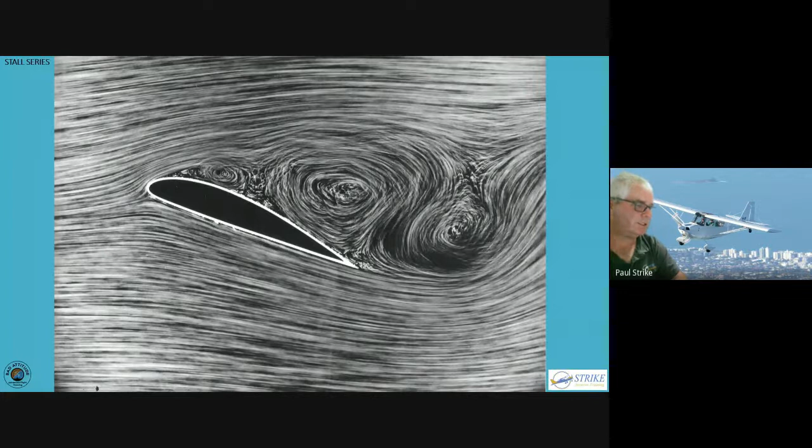So everybody should see a really nice picture of an aerofoil in a wind tunnel. I'm really excited, we've just acquired a wind tunnel. It needs a bit of work, but I'm really excited about it. It's on the list of things, the copious amounts of things that we have to do. If anybody can't see the stall, the wing aerofoil section on the screen, just let me know by audio. And as people arrive, I'll just let them into the room.

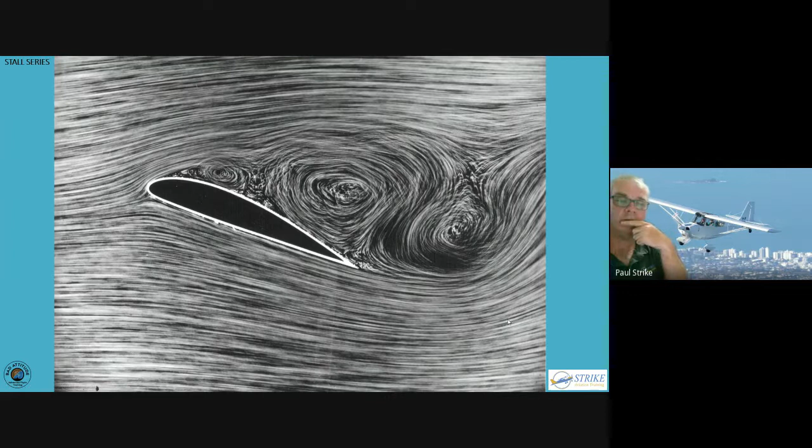All right, we'll make a start. So just a little bit about myself. I am a LAME, a licensed aircraft maintenance engineer, for you, Tony. And I did 16 years in the Air Force. I've worked in Canada, worked in PNG, worked in the Middle East. Got a company called Flight Safety Solutions where we've got a fully compliant aircraft record system that's CASAR 43 ready - that's a whole other presentation. We provide aircraft owner support, stands on board, and a couple of other people. From a flight training perspective, grade 1 flight instructor for GA and an RAAus flight instructor. I used to be the CFI, but my wife's taken over for that now.

I just got a phone call from somebody who's supposed to log in. Hello, Didi, you can't log on? Just click on that link and it'll just ask you to join in. No, the other one, on your original email from Try Booking, it'll have a link. Okay, I'll just email it to you. Sorry everybody, I'll just get Dita sorted out here. Dita, I'll email it to you, you'll have it in 2 seconds, mate. Yeah, bye.

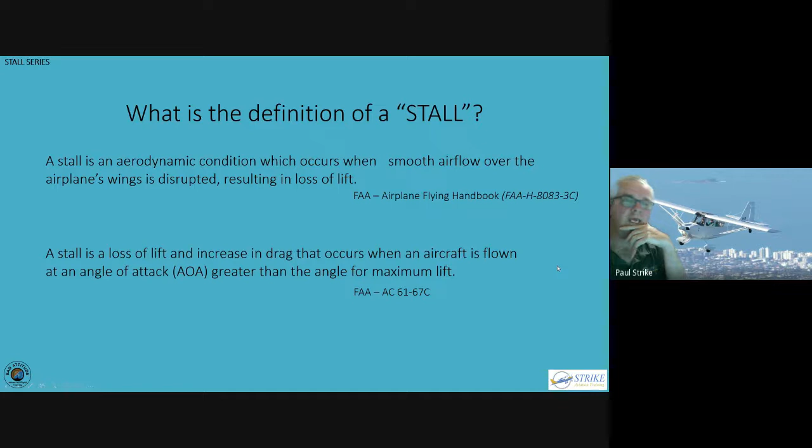So I had somebody say to me, what do you mean you're having a discussion on stalls? We've got published stall speeds, the bottom of the green arc without flap and bottom of the white arc with flap. What else is there? There are actually 3 contributors to a stall, and we're going to talk about all 3 of them tonight: angle of attack, speed, and load. So we'll start off with angle of attack.

Now, we'll start off with another definition. Angle of attack. This should be pretty generic. It's pretty easy. It's only one thing. It's the angle between the chord line of the wing and the relative wind. That's what the FAA Flying Handbook says. All right. So again, we don't want to get bogged down with definitions. We want to have it practical.

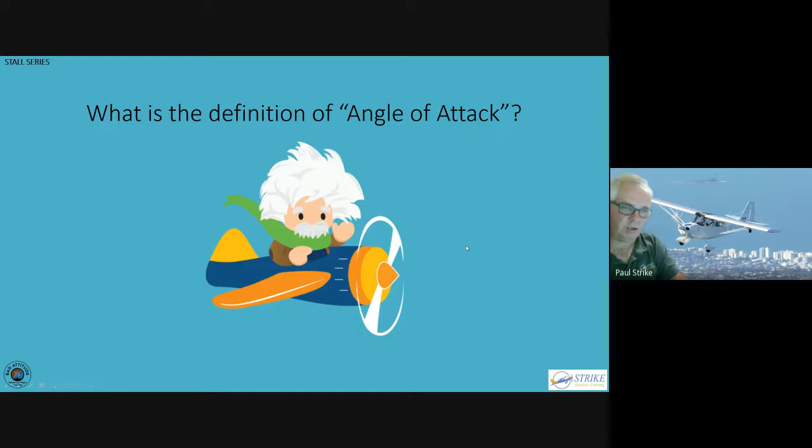So I had a commercial pilot come to fly with us from another school, and he'd actually undertaken upset recovery training as well. And we were having a discussion because he wanted to do a tail wheel endorsement. So we're having a talk about angle of attack and stalls and things like that. And this is the process I went through with him.

So what I'm going to do is I'm going to just ask anybody who agrees with these 3, raise your hand or with the little button. If you don't agree with what the answer was or what those examples were, don't raise your hand. So if anybody agrees that those 3 examples of angle of attack are correct? Raise your hand. Okay, nobody. That's awesome. That's really good. So it's clearly not correct.

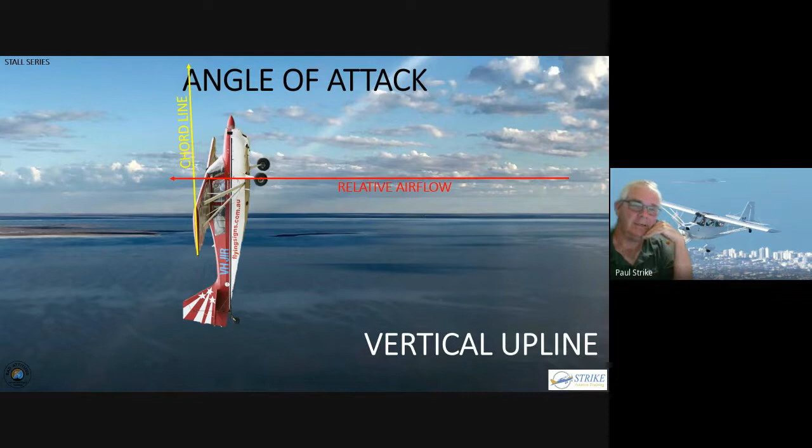So let's say I apply full power and pull back on the stick, and I'm going vertically up. That's our chord line. Where's our relative airflow coming from? And again, he said, here. And I went, okay. What about if I'm pitching vertically down? This is my chord line. Where's my relative airflow coming from now? And again, he said, here.

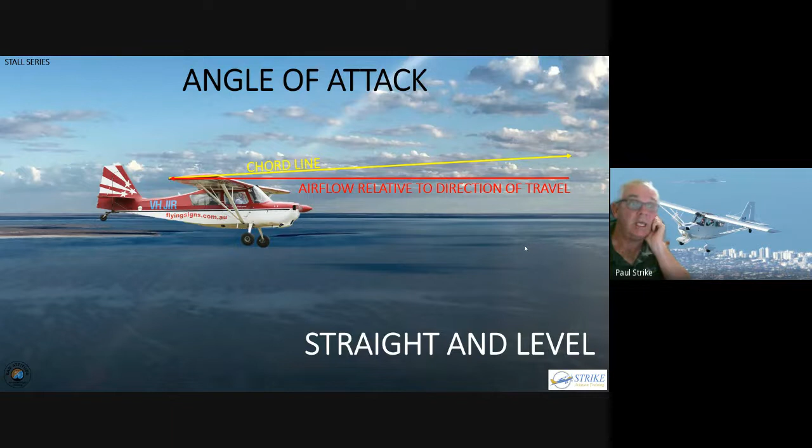So I basically had this. Okay, we've got a clear absence of some understanding here. So I changed the words again. I said, look, if we're flying straight and level, and this is our chord line, this is the airflow relative to our direction of travel. And he agreed, yeah, that's right. And I said, that's our angle of attack.

And so every time we read a definition, this one word here, this word wind, the way we deliver it, we need to make sure that people understand that, because people can take that 2 different ways. So that's just an example of how reading a definition in a book but applying it to real life can be confusing. So we've all seen this picture, I'm sure.

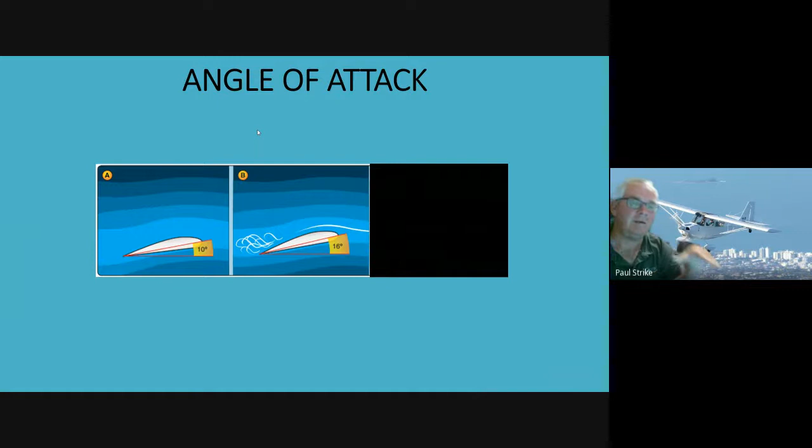If anybody hasn't seen it, this is an example of the airflow over an aerofoil section from our good friends at Boldmethod. And then at 16 degrees, we get a bit of turbulence, and at 17 degrees, we get a lot of turbulence. So this is what we call the critical angle. Actually, sorry, I'm going to go back to here. The point at the stall is the critical angle.

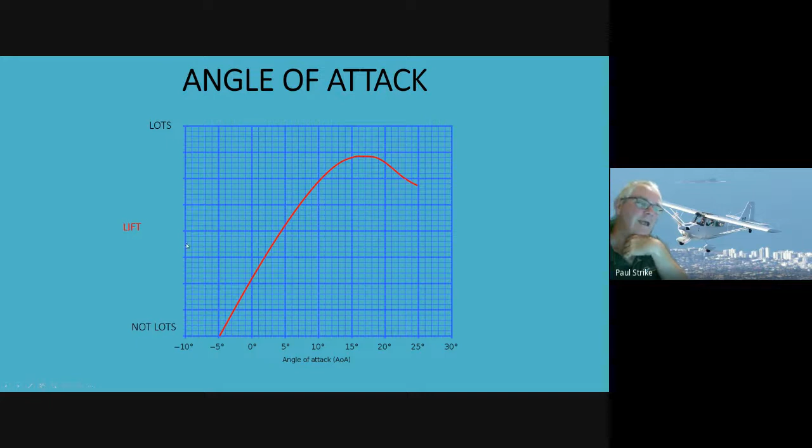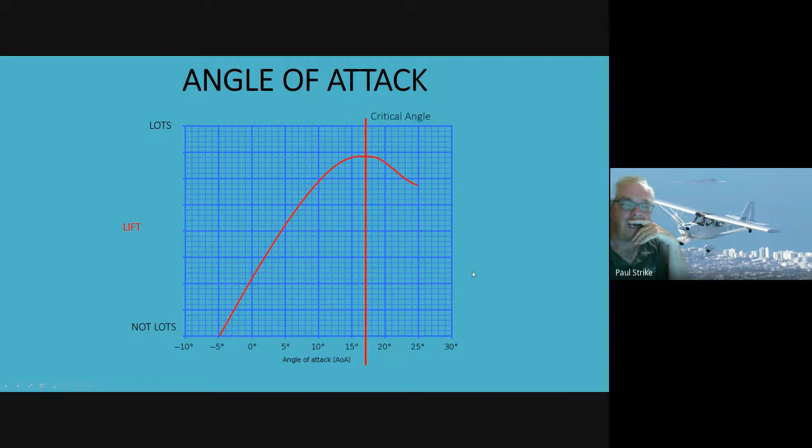And the values really aren't important. Up the top, we've got lots of lift, and down the bottom, we've got not a lot of lift, if everybody can follow that. Now, ask around the bar room at any pub, and you ask, what's the critical angle? Some people will say 15, some will say 16, some will say 17, some will say 19, some 18, whatever. We're just going to use 17 as an example.

We need to realize that this is not a definitive graph for any particular airplane. It's just for diagrammatical purposes only. But if I ask what is a stall, I sometimes get the answer: when the wings are no longer producing lift. Now, I don't know if any instructors have heard people say that, because people read books and they read these examples of definitions. It's when it's not producing lift. So let's have a look at this chart and dissect it a little bit.

So let's say we're flying at 15 degrees angle of attack, and we'll come across here and we're producing X lift. All right. Now I'm going to increase the angle of attack to 19 degrees. And if I read this graph right, and all the scholars in the room will say that I'm actually producing X amount of lift. It's the same amount of lift that I produced at 15 degrees angle of attack on the left side of the critical angle line, but at 19 degrees.

So if the lift generated by both sides of the critical angle is the same, then why are we stalled? I'll pose that question to you guys and girls now. Write your thoughts in the comments box.

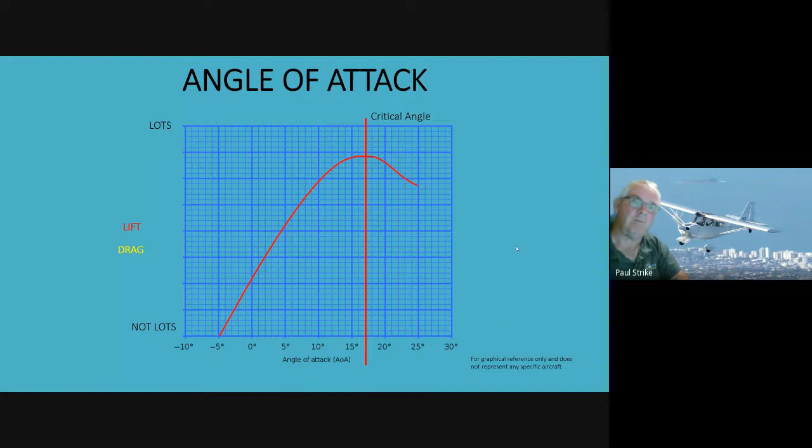I just want to highlight this statement down the corner here: for graphical reference only, does not represent any specific aircraft. However, I've had some very smart people who helped me out along the way send me a whole bunch of stuff from NASA and flight testing and all that sort of stuff, and it just spins my head around. So I try to take what I've got and make it more readable for us mere mortals. So the drag curve against angle of attack goes like this.

Does that answer the question? Oh, good on you, Dieter. How are you, mate?

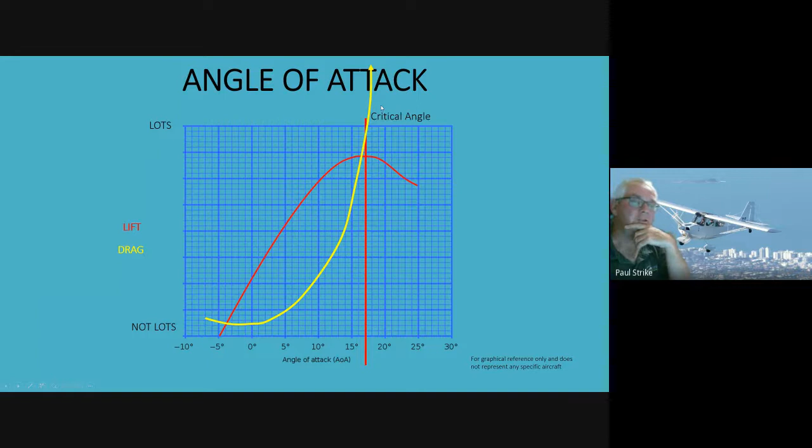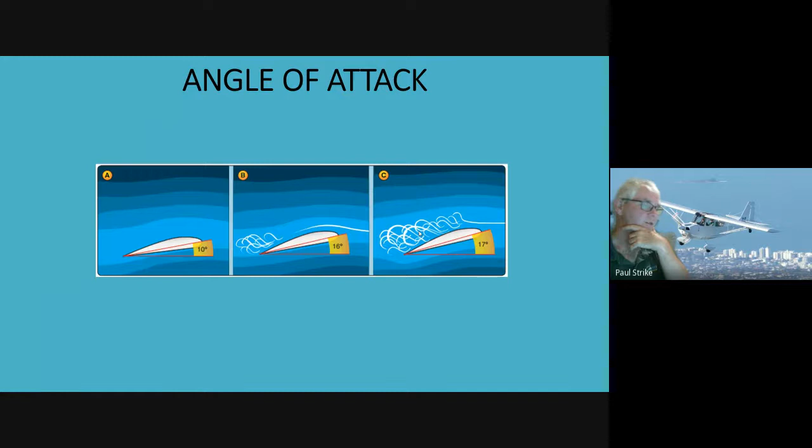So, past the critical angle, the amount of drag, have a look at that chart now. Above 17 degrees, all of that drag is the reason why we're stalled. So, moving on, there's a lot more about angle of attack. We're just trying to keep it in a controlled environment here. There's a lot more to learn.

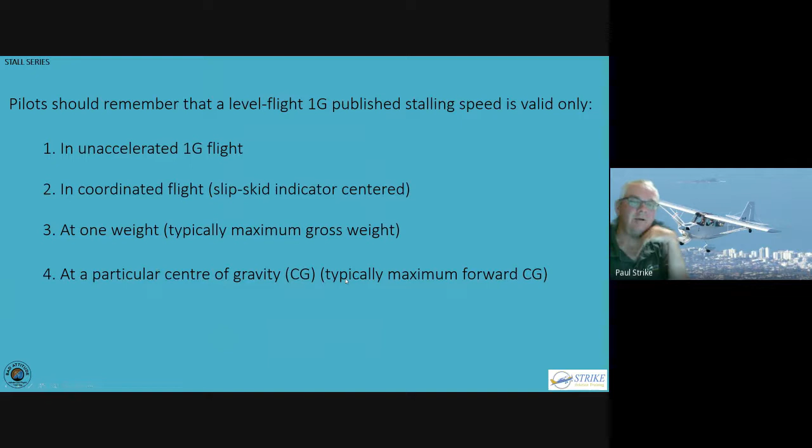Everybody should remember that at level flight in 1G, the published stalling speed is only valid for unaccelerated 1G flight, which means you're not pulling any G, you're not loading the airplane. You're in coordinated flight. You're at one weight, typically the maximum gross weight, and you're at a particular center of gravity, normally the maximum forward CG. So there's a lot of things to consider there, a lot of variables, all right? And we're going to talk more about these variables.

Not very exciting. And we'll be talking more about those on the next episode, which will be in the next couple of weeks, because I've got to do a whole bunch of video editing.

So how do we perform this? From straight and level balanced flight, we are going to reduce the power to idle and apply a little bit of rudder to maintain balance, left rudder. And that's a whole other story. If you're not sure why you need left rudder, give me a call and I can give you about 5 seconds on that. As the aircraft starts to descend, if you want to maintain altitude, you need to increase the angle of attack. That's your basic slow flight rule.

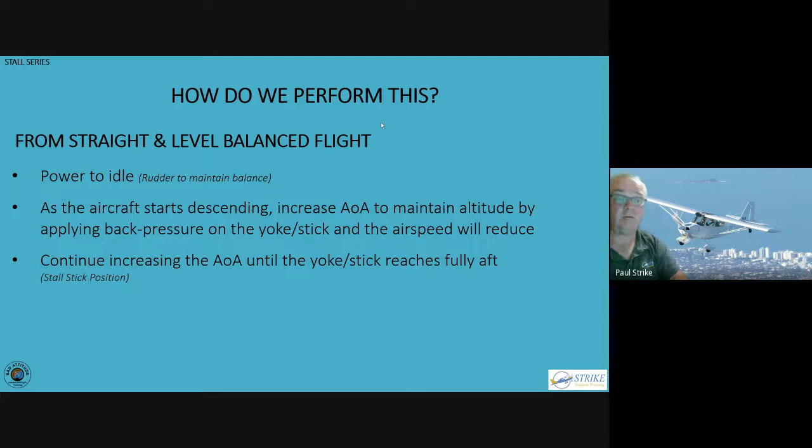I'm going to reduce power, increase the angle of attack by applying back pressure on the yoke or the stick, but we're going to sacrifice airspeed. As we continue to reduce the airspeed, we're going to descend. If we want to maintain altitude, we need to continue to increase the angle of attack until the yoke reaches the fully aft position, and that's called the stall stick position. If nobody's heard of that, make yourself familiar with it. We're going to be talking about it a couple of times during this presentation.

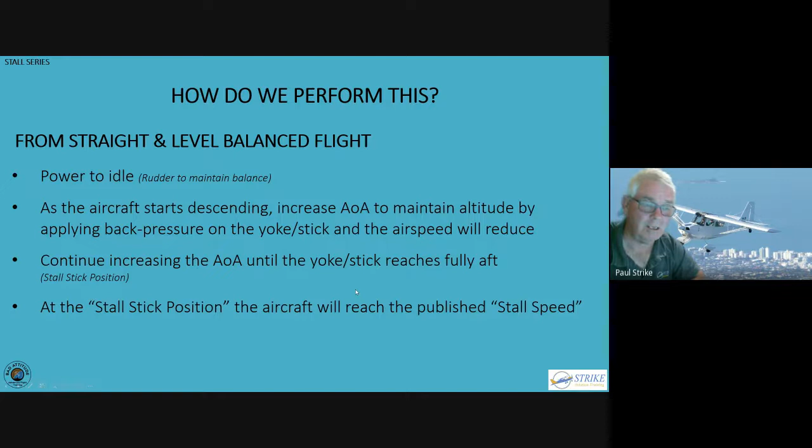At the stall stick position, the aircraft will reach the published stall speed if we're at wings level at 1G. Simple as that. Now, most pilots, as I said, will recall this exercise and that they do it slowly and deliberately at idle and 1G. So we're just going to break down this slow and deliberate at 1G. We're flying straight and level. Our thrust will equal our drag and our lift will equal our weight. That's what straight and level is. Straight and level unaccelerated flight.

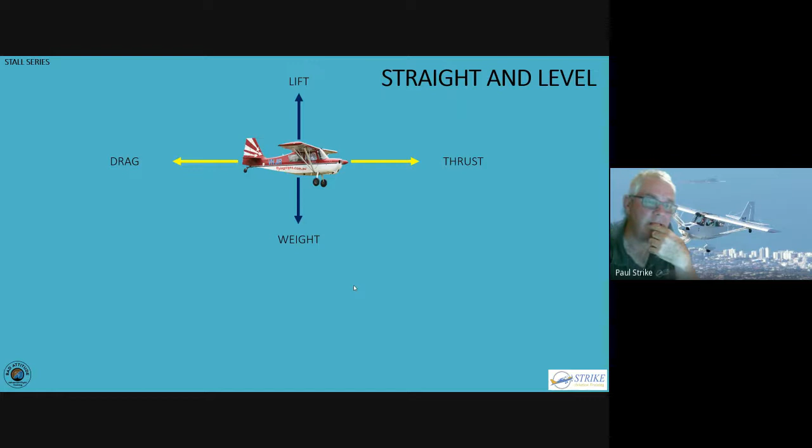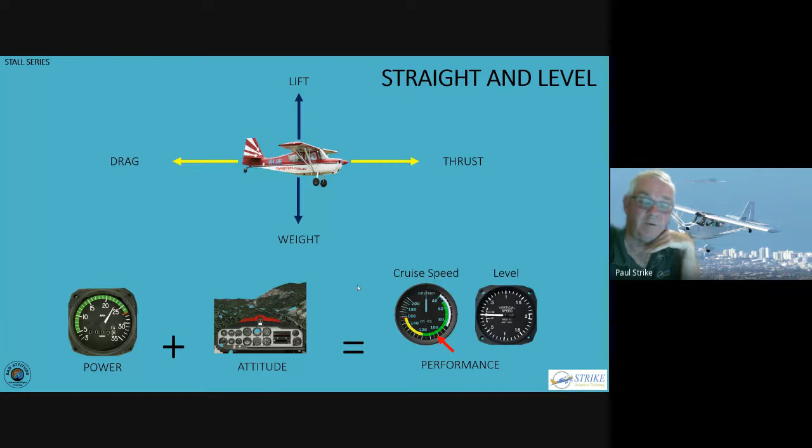So we have power at 23 plus our cruise attitude, which will equal our performance, which will give us our cruise speed, and level flight subject to thermal activity. Okay? And if anybody's got a question at all, just raise your hand or click your microphone on and say so. When we're going to go do the idle stall, we'll go through that process.

So we're flying along and we've done our HASELL checks or our pre-aerobatic checks or maneuvering checks. And we're going to reduce the thrust to idle and our drag will start to increase. And if we want lift to remain the same as weight so that we maintain our altitude, we need to ease back on the stick, increase the angle of attack, and create more lift. What that means is if we've got our power at idle, we need to have an increasing nose attitude, which will give us a decreasing airspeed to maintain level flight.

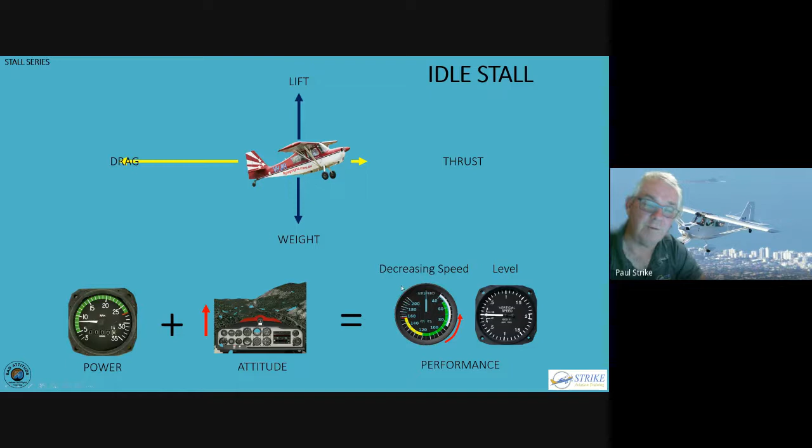All right? So looking at that with a relationship from our three wing sections here with the different angles of attack, we've got our aeroplane flying straight and level, and this is our airflow relative to the direction of travel, and it's horizontal to the horizon because we want to fly level. That's the name of the exercise. We reduce power to idle, and we will start to descend if we don't do anything. The nose will pitch down.

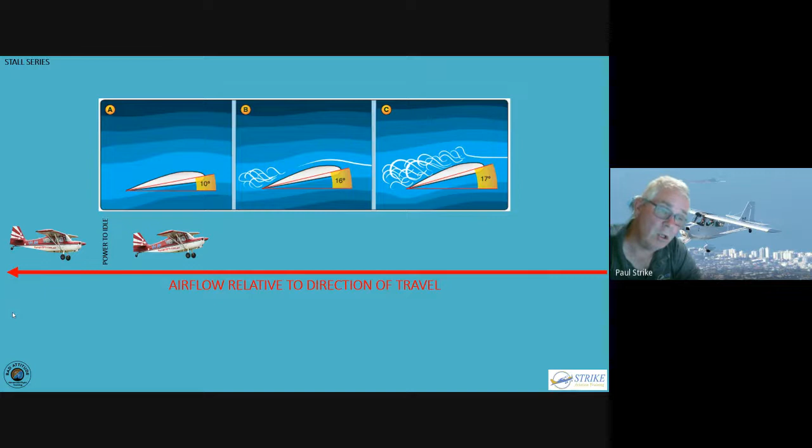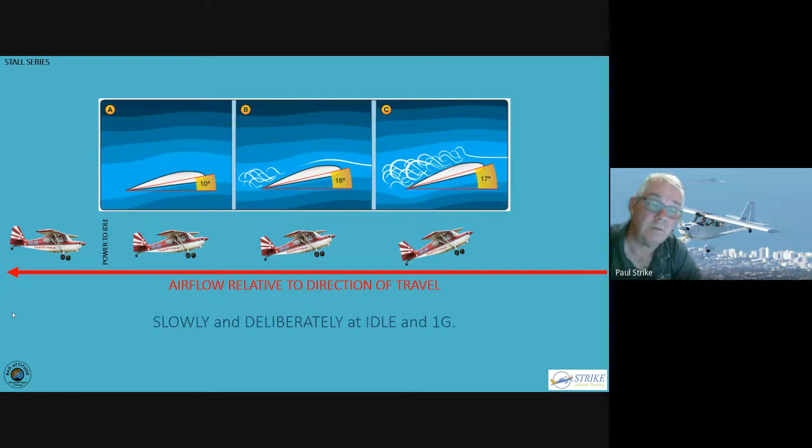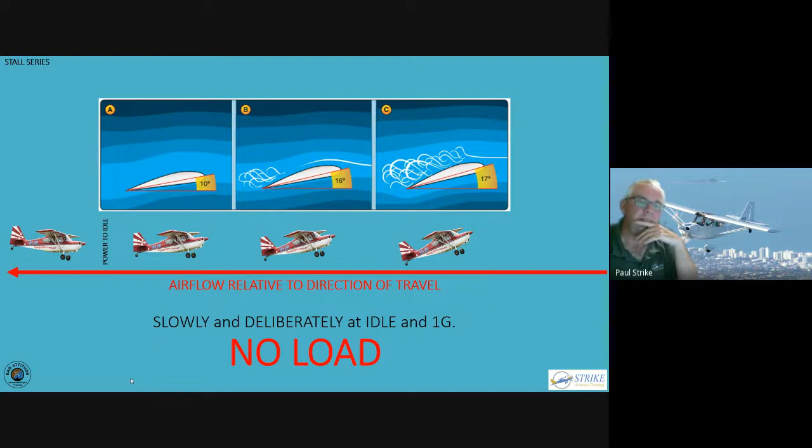But if we want to maintain our altitude, we need to increase the angle of attack. And as we slow down more, we need to increase the angle of attack more. The stick comes back to the stall stick position and we are stalled. Slowly and deliberately at idle and 1G. No load. Now, that's a statement that a lot of people who are not interested in aerobatics are not really sure what that means. So let's have a talk about what we mean by no load.

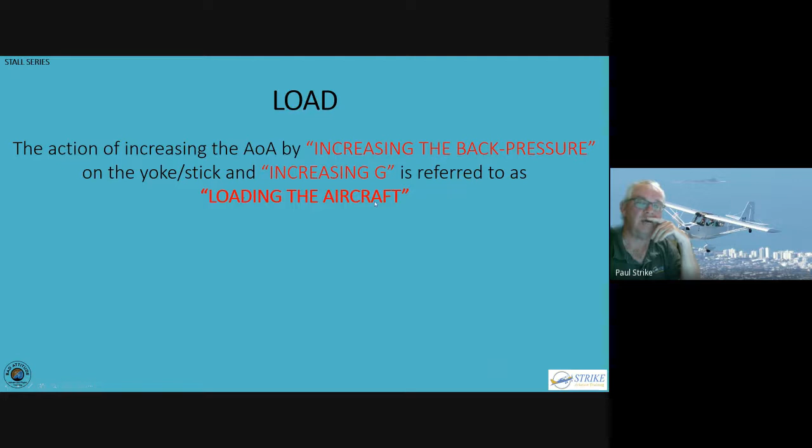So what is this load thing? The action of increasing the angle of attack by increasing the back pressure on the yoke and increasing the G force is referred to as loading the aircraft. The action of decreasing the angle of attack by releasing the back pressure on the yoke and decreasing G is referred to as unloading the aircraft.

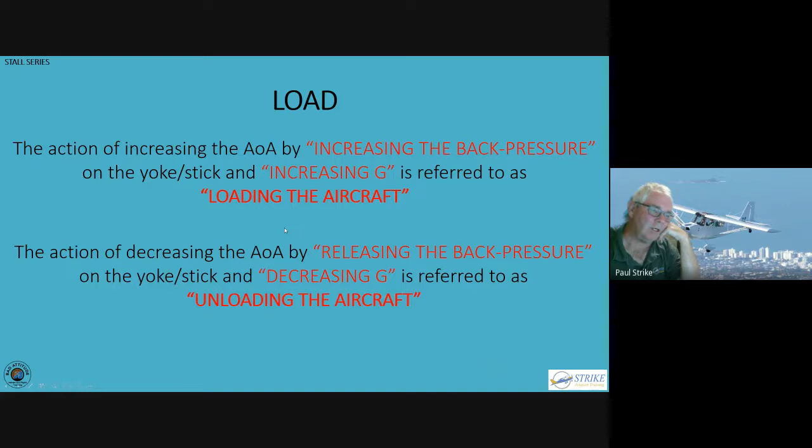Now, it's important to remember here there is a difference between pushing the stick forward and releasing the back pressure. All right, and we'll be talking a bit more about that in our video dissection in a couple of weeks. But for now, let's have a look at the effects of load factor relative to the stall.

Now, again, this diagram is something that I found very, very useful, but I didn't learn about it until after I'd become a flight instructor, and nobody really talked to me about it. I think a lot of people in their initial training, this might be too much for them to get their head around, but I think everybody in the room here has probably got enough experience to understand what we're talking about. So what we're going to be talking about is what's called a Vg diagram, and this is the indicated

airspeed, the velocity. I'm having a problem with my mouse. Just had a bit of a runaway here. We've got... giving away all my trade secrets here. Sorry about this, guys and girls.

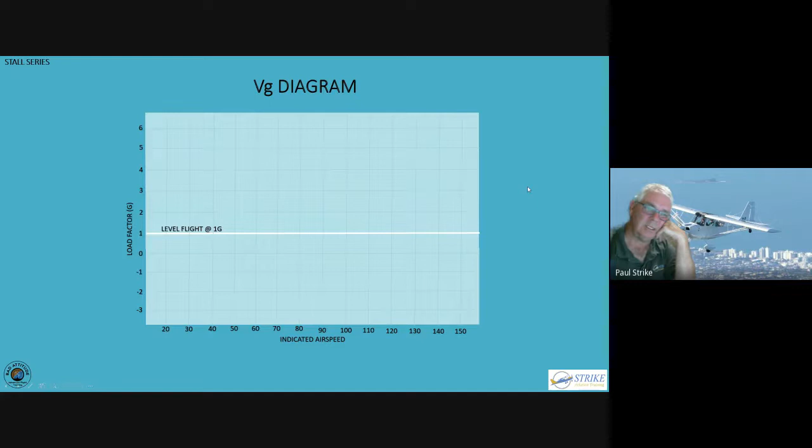So we've got indicated airspeed and load factor and level flight at 1G. Now, if you've heard the statement, keep it in the envelope, we're going to talk about the envelope. So fly within the envelope. And this envelope, the Vg diagram, is how the colors on the airspeed indicator are derived. So follow me through the bouncing ball and we'll have a look at this thing here. So this is a fictitious aeroplane, by the way.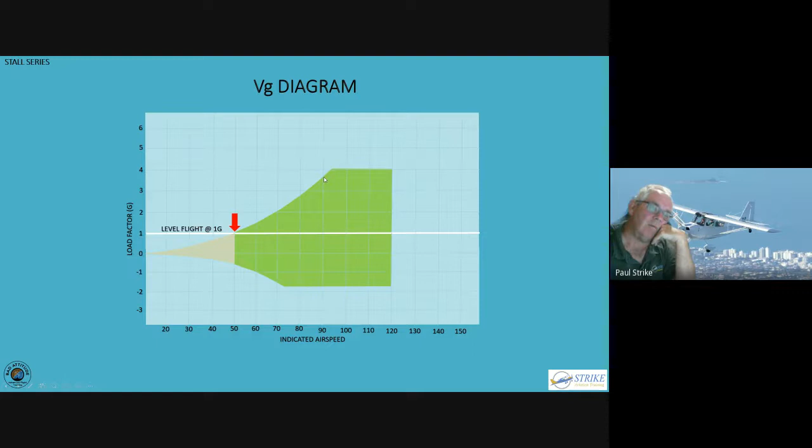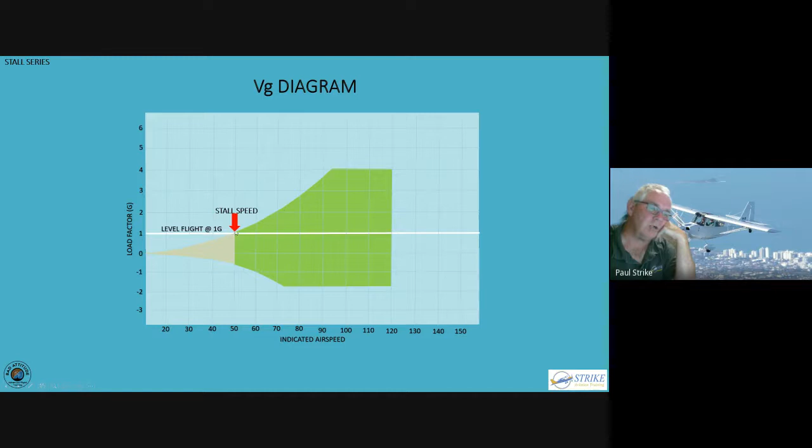This point here is the bottom of this line. This line here, I've got my little red spotter. I hope you can see it. This line here is the stall line, and this line at 1G is 50 knots. And that is our stall speed for this aeroplane, where the stall line intersects the 1G line. And on the airspeed indicator, it's the bottom of the green. I'm not going to worry about flaps for this example. We're just talking about the bottom of the green.

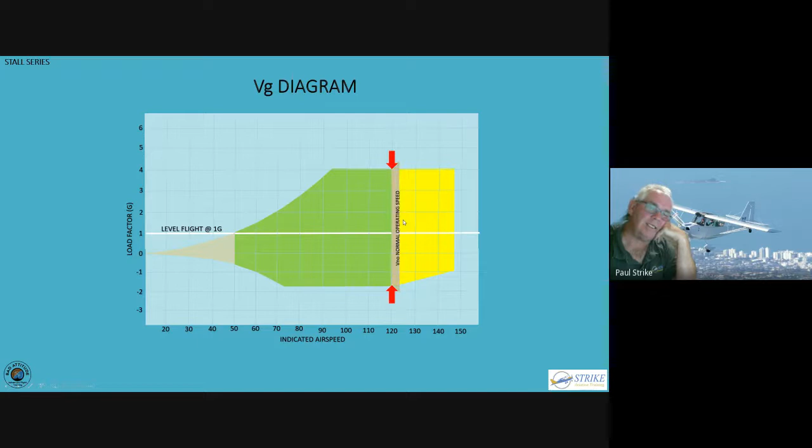Dieter sent me a message. I can't read that, Dieter. Sorry, mate.

So that's the maximum positive G. And this point down here is the maximum negative G for the aeroplane. Now, important thing to note about maximum positive G is that that is the point at which you should maneuver below. You should never exceed that, because the manufacturer of the aeroplane needs to ensure that there is a 1.5 tolerance from the maximum G before there is a structural failure.

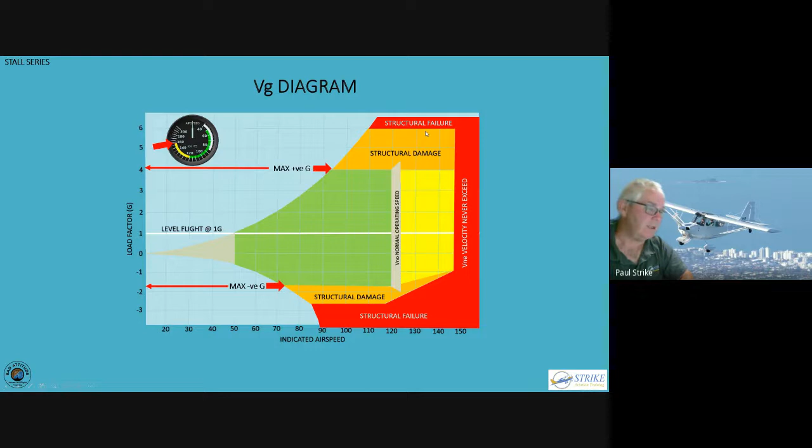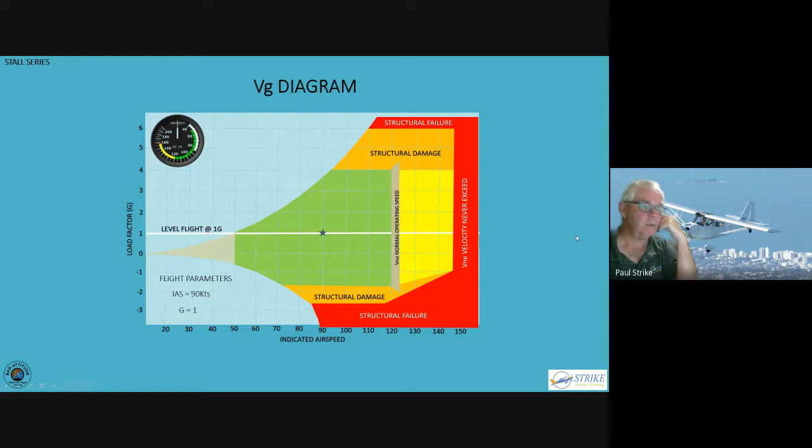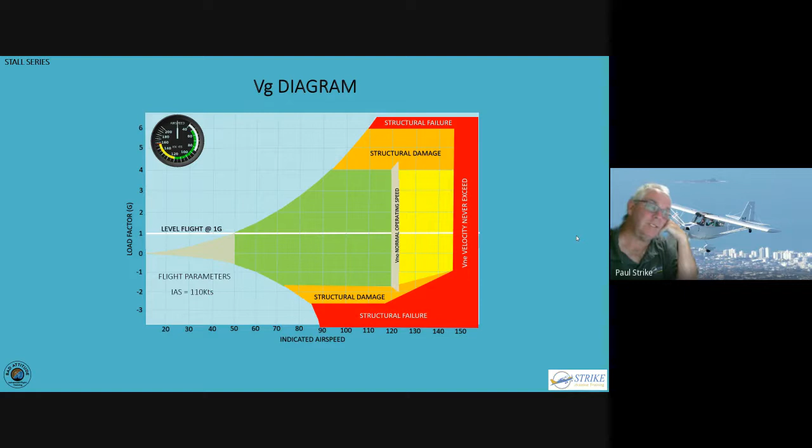So let's have a look how we can use this graph and read this graph. If I'm flying the airplane at 90 knots and I am flying at 1G, I'm going to be at this location on the VG diagram. That's right there. That's probably normal cruise for your generic Decathlon or Citabria. If I fly at 110 knots and I pull 3G, then I'm going to be at this spot here. Now, that's still within the normal parameters of this aeroplane, so that's safe. All right?

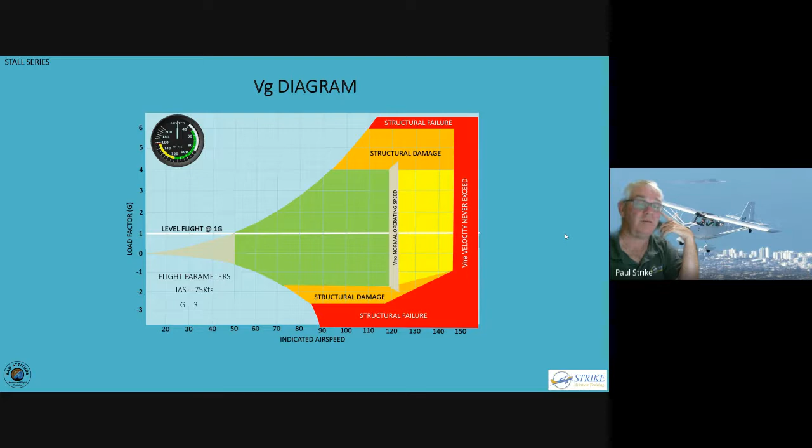If I'm flying at 75 knots and I'm flying at 1G, just cruising along straight and level, I'm going to be there. However, if I'm flying at 75 knots and I pull 3G, I'm going to be outside. And as a matter of fact, the aeroplane will actually stall on this line coming up from the 75 knots. It'll stall right here at about 2.3 G. And we'll talk more about that in a second.

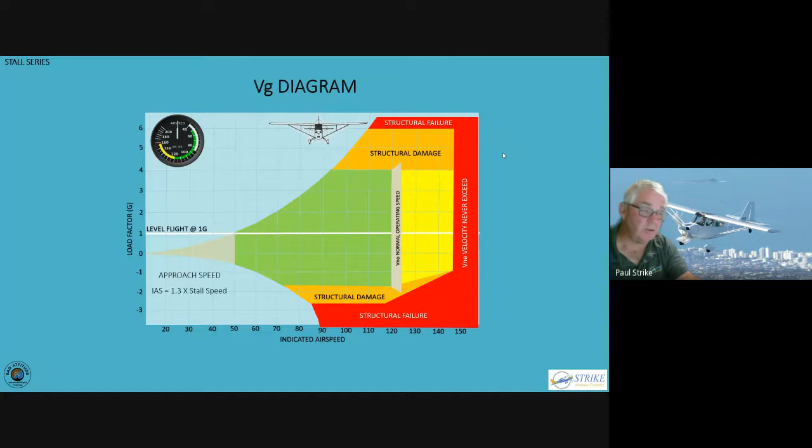So let's think about when we're on an approach. We're slow, we're configured for a landing. What's our approach speed? Well, our approach speed, for the instructors in the room and the others, as a general rule of thumb, is 1.3 times the stall speed. And with all the wind we've been having lately, you might want to put a little bit on for the wind. But for our example here, we've got a calm day.

Hello, Greg sent me a message.

Everybody just turn your mic on and say hello, make sure I'm not talking to myself. Hello, hi, hello. We can hear you. Can you see the presentation? Yes, yeah. Oh, you guys can see me too, I did not know that. Like I said, it's the first time.

So our approach speed for this aeroplane, if our stall speed's 50, then our approach speed is going to be 1.3 times that, and that's going to be at 65 knots. That's a valid speed to come in at, not too much energy, and a good buffer away from the stall, which is at 50 knots.

So you can see the red circle there is the stall point at 1G, and we're approaching at 65 knots at 1G. No load. We're not pulling on the stick and creating G.

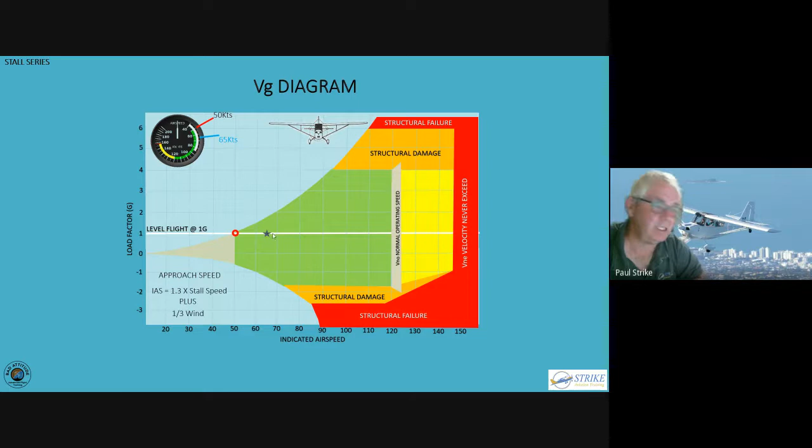Now, a lot of people talk about the stall spin, the base to final, the downwind, the base turn, all that sort of thing. How many people have had an instructor, or if you're an instructor, how many instructors have said to their student, don't bank steep close to the ground? Lots of people? Yes. Hands? Yes, yes, all right.

Did your instructor ever tell you why? Yes, no? Or did you just go, oh, my instructor said don't do that, so I'm not going to do it?

Yeah, I guess when I was being shown how to do this, I was told don't bank steeply, but principally because if you, for example, overshot the centre line of the runway, you wouldn't be tempted to yank back on the stick to try to get back on the centre line, which then loads up the aircraft. And if you're not balanced, you're in all sorts of trouble then.

Yeah, exactly right. Okay, so for those of you who have had an instructor tell you, who hasn't told you, did you ever ask? So don't be afraid to challenge your instructor and find out more if you've got that thirst for knowledge. So let's have a talk about the angle of bank and the load factor.

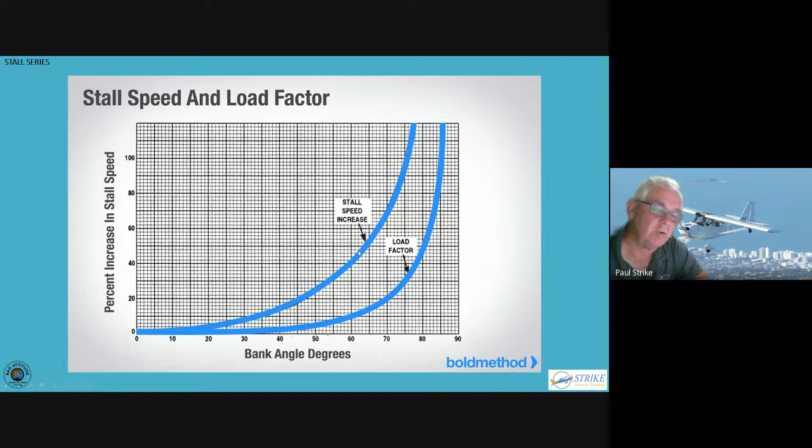So this graph here, again from Boldmethod, when we bank the aircraft, if we want to have level flight - now this graph only is applicable if you are trying to maintain level flight, and we'll talk more about that in a minute. So for a load factor, for each change in the load factor, there will be a stall speed increase. All right, and we're going to look at that now.

So let's say we're flying along and we are on the base to final turn, for example, and we apply aileron and rudder in balance and we get 30 degrees angle of bank. Now our load factor is going to increase by 1.15 G and our stall speed will increase by 1.07 if we are trying to maintain level, if we're trying to do a level turn.

Okay, if you don't pull back on the stick, the nose will pitch down and you will descend. If you don't raise the nose to try and keep the aircraft from descending, you won't get an increase in load factor and the consequent increase in stall speed.

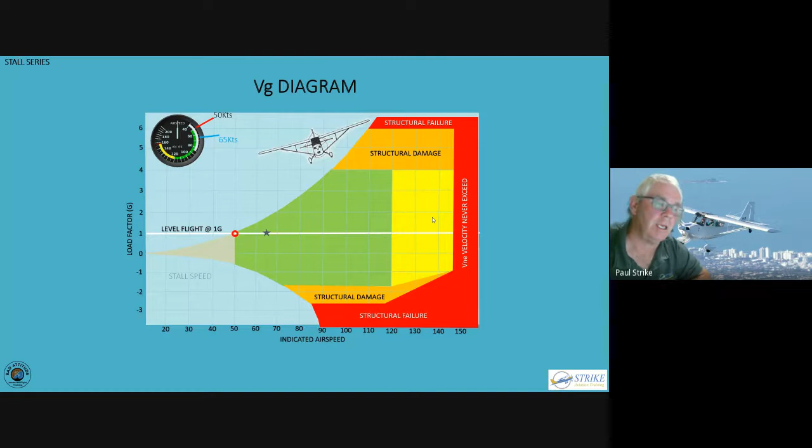But what that means is if you do load the aircraft, like what Stan was saying, our stall speed is the indicated airspeed times 1.07, which means that the stall speed is going to climb up this leading edge stall curve, which means that our stall speed is now 54 knots because we're loading the aircraft. Plus, we have a load factor of 1.15 G, which puts us here.

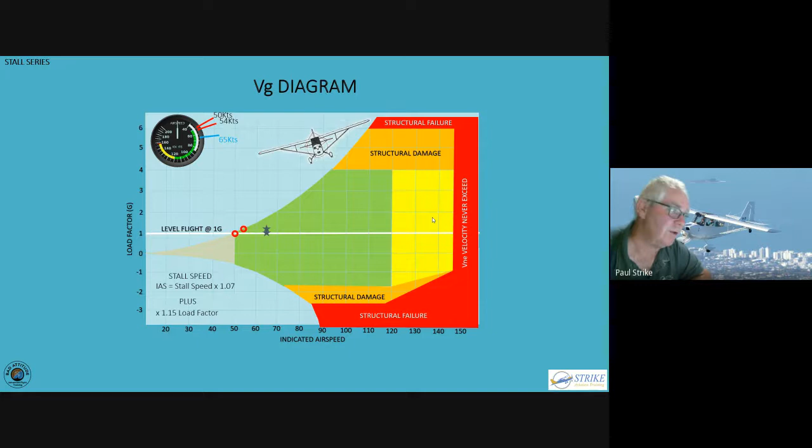Everybody following so far? Now, let's use Stan's example of we're overshooting the center line. So we go, oh, getting a bit past the center line here. I'm going to steepen the turn up and we go to 45 degrees and we're getting low.

So we're going to pull back on that stick to try and not descend and keep the aeroplane in a level turn. So our load factor is going to go up 1.41 and our stall speed by 1.19. Again, please understand that's if you're trying to load the aircraft or pull the stick back to keep the aeroplane from descending. So the parameters will be stall speed will go by a factor of 1.19, which comes up here, which is now 59 knots.

Now, all the time we're being very diligent pilots and we're maintaining our decided approach speed, which is 65 knots. Then we've got the load factor in because we're pulling the stick back and we're starting to load the aeroplane. And that's going to put us here on that chart, 65 knots with a load factor of 1.41. You see how our safety tolerance is starting to decay.

We've really shot past, so we bank the aircraft over, and we're getting low, so we pull back on the stick. 60 degrees angle of bank is a really good number because it's exactly 2G. We have to increase the lift twice. The aeroplane weighs twice as much, and our stall speed is going to increase by 1.41.

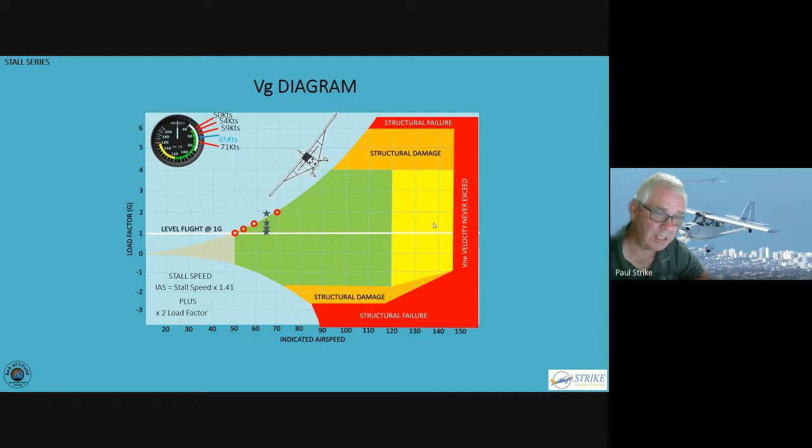If we are out of balance and we stall, that's an accelerated stall in a turn, you will spin. And at base to final turn, you will not survive. All right.

So what are we talking about here? We've got a whole bunch of information coming at you. We talked about angle of attack, we talked about airspeed, we talked about aircraft load. It's got to be an easier way to remember this stuff. And so if you've got information overload, we're going to look at this stuff now.

So is anybody, hands up if you're familiar with the fire triangle? Anybody heard of that? Yep, a few hands going up. Military people, yeah, all good, excellent. People in the fire departments and all that stuff, excellent.

All right, if we have oxygen, heat, and fuel in the right quantities with a source of ignition, you will get a fire. So I'm going to introduce you all to the stall triangle.

Now, what the stall triangle is, we have speed, load, and angle of attack. If we keep the aeroplane inside the envelope, like what we're talking about with the VG diagram, the aeroplane will fly just fine. However, if we exceed the critical angle of attack, the aeroplane will stall. If we allow the speed of the aeroplane to get below VS, we will stall. And if we exceed the load factor at the front of that lift line, the stall line on the VG diagram, we're going to get an increase in stall speed, and we will stall.

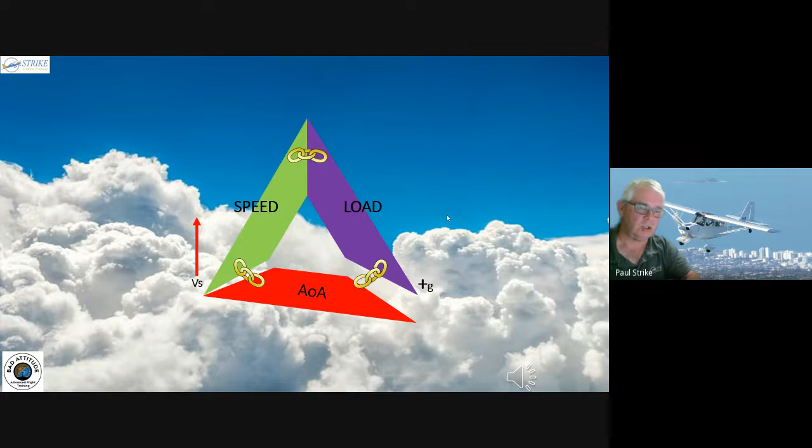So what that means is, if I increase the angle of attack at 1G — so you can see here on the right-hand side of the load, we're maintaining 1G — and I keep pulling that back, I'm eventually going to reach my stall speed, and I'll stall. Likewise, if I load the aeroplane up with G, I'm going to go further up onto the stall line on the VG diagram, and I'm going to get an increased stall speed, and I'm going to stall.

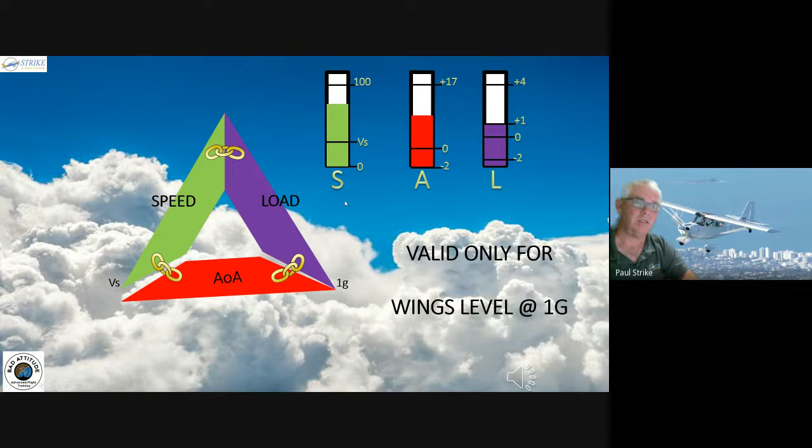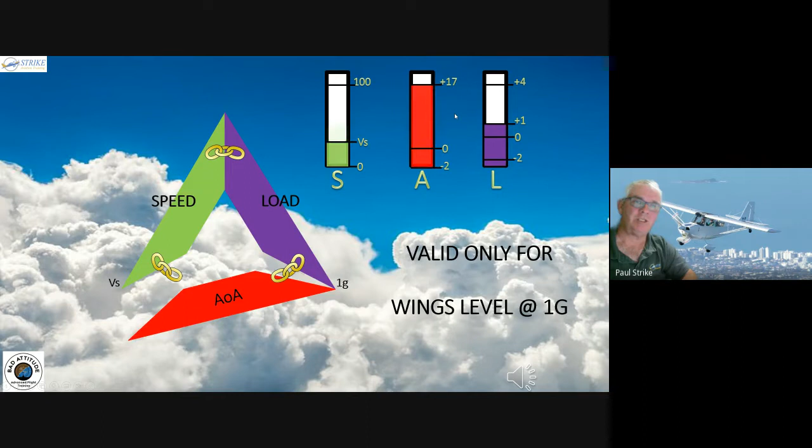And what we're going to do is bring the power to idle, and we're going to increase the angle of attack. And we're going to get a resultant change in the speed, looking at the vertical bars on the right-hand corner. As we slow down more, I keep easing the stick back towards the stall stick position, and my angle of attack is increasing, and I'm sacrificing airspeed to do so, and my load is still 1. When I reach the critical angle, my speed gets to the stall speed, and we stall the aeroplane. But that's only valid at 1G, wings level.

So let's look at what happens if we load the aeroplane up in this example. So again, we've got about 100 knots on the airspeed indicator. We've got 4 degrees angle of attack, and we're at 1G. Except this time, we're just going to reef back on the controls and load the aeroplane up, or we're going to roll the aircraft and pull in the turn.

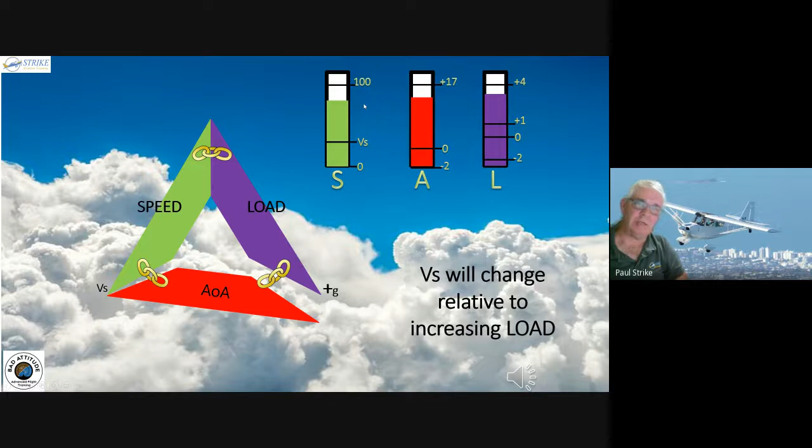So as we increase the angle of attack, our G loading is going up. 4 is our maximum G. We're still doing well above stall speed. When we reach the critical angle, it'll be at our design load limit, and the airplane will stall, and our speed is well above the stall speed.

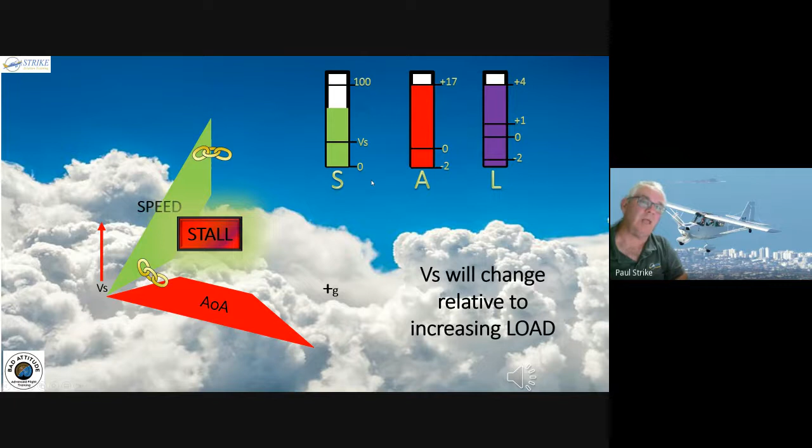So what that basically means is, if you overshoot the center line, don't pull the aeroplane. If you're low and you find yourself in this position, unload the aeroplane, release the back pressure, roll the wings level in balance, apply full power, climb and go around. Simple as that. Just don't pull the controls back. Otherwise you can get yourself in trouble. All right.

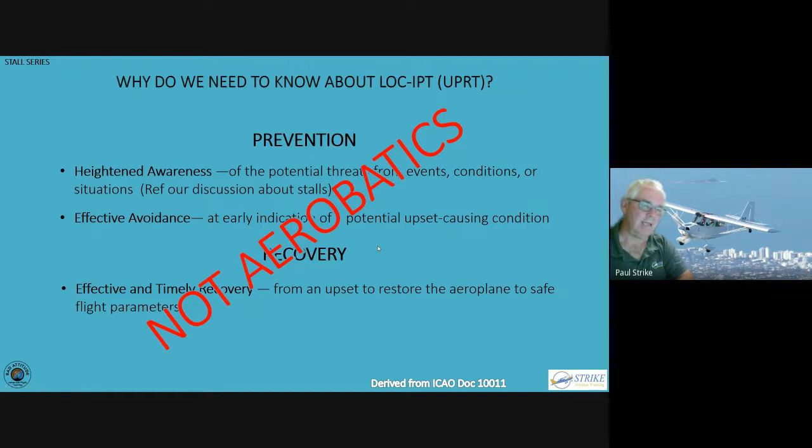We don't go out and do aerobatics. Aerobatics is about purposely taking the airplane to the edge of the envelope and beyond. Loss of control prevention training is about identifying and having tools in your toolbox so that you can prevent an unintentional upset. We don't intend to go out and stall and spin the aeroplane, but sometimes the conditions will put us there.

So the training process for that is academic training and practical training. We don't have a flight simulator training device, so it's all on aeroplane, and we have training courses that have it split between the Decathlon and non-utility category airplanes, so that you can understand the differences and how to handle those airplanes. But there's about 80% in the classroom and 20% on the aeroplane. So there's a lot of classroom.

It's not about going out and turning yourself upside down. It's about talking about all of these items and then going out with new knowledge and new information to create new skills that will make you a safer pilot. So stalls, it's not all about airspeed.

And like everything out there, there's a lot of stuff on social media that is misinformation. There are people out there trying to do the right thing, much like myself. I'm not perfect. I'm giving you the best information that I've got available, and hopefully you're learning some stuff. But there are places that are from a reputable source, and unfortunately, it's from our regulators. The ATSB, our transport safety investigators, Tony, for those who don't know, Tony's in the UK tuning in. The ATSB publish some information to address accidents that they've investigated.